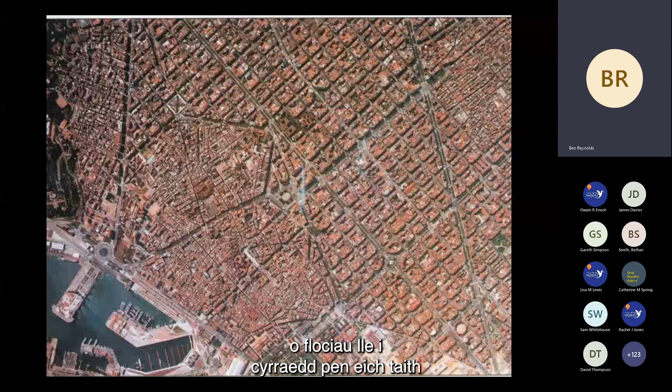In historic cities - that's Barcelona - you can see from an aerial view this fine grain, this grid system of blocks, where to get to your destination you shouldn't really have to take more than 3 turns, sometimes just 2. You can do that by wandering along the streets and weaving your way in and out of the blocks. Paris is based on very similar principles.

A lot of this has vanished in the UK because so much of it was flattened in the Second World War, and when it was rebuilt, thinking was first and foremost about cars rather than about people and how people move around space. But the basic fundamental principle is relatively short blocks that are easy to navigate through.

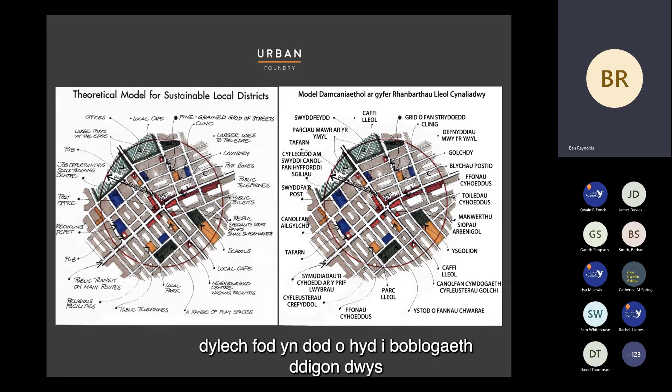The idea of that 5 minutes, roughly, if it's flat, is roughly 400 meters, 10 minutes about 800 meters. If you've got a hill in the way, it goes down a little bit, but it's roughly that. You can draw a circle, and within that circle you should be finding enough density of population to support the commercial centre.

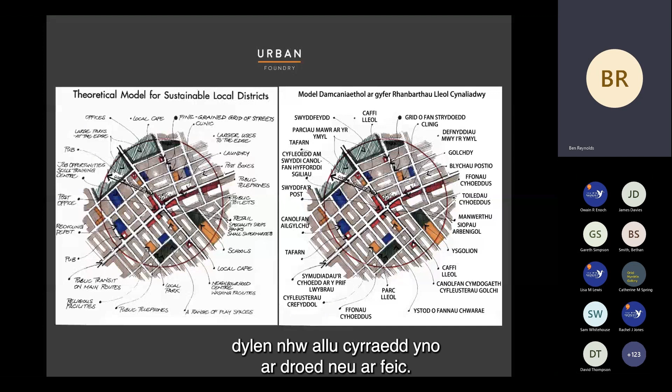And that density of population should be able to get there if they're reasonably able-bodied. They should be able to get there on foot or by cycle. They shouldn't have to jump in a car to go and get a pint of milk. They should be able to service their basic daily needs within that 5 to 10 minute walk.

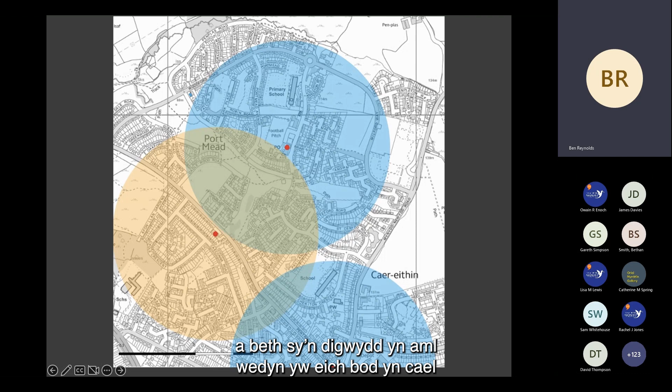And what often happens then is you get this yellow type of circle, which is because it's crumbling and it's falling, the private sector's trying to sort itself out with a new centre, but actually it doesn't work for anybody. And so it's off the centre, which means all the people who've got to get in the car to go and get there, and it creates difficulty.

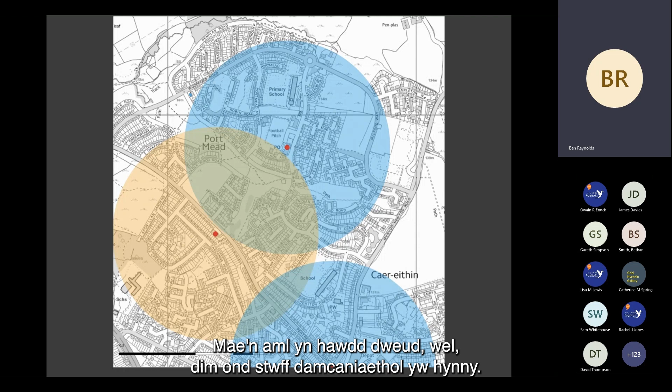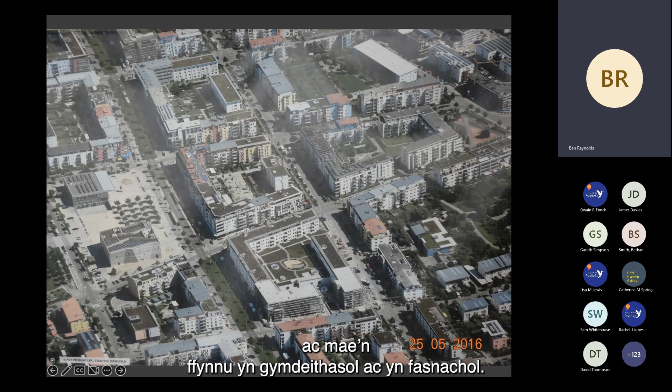And it's often easy to say, well, that's just theoretical stuff, it doesn't work. This is Rieselfeld in Freiburg in Germany. That is a city that is roughly the same size as Swansea. This settlement is roughly the same distance from the centre as that one I've just shown you in Blaen-y-maes, and yet look at the density that they're getting in here, and it's socially and commercially thriving. And so actually you can do it. It's not about, oh, well, we're not New York, we're not Paris or whatever. You can do it in terms of smaller towns and cities as well, of get that density.

And that's where the current idea, which is very, very poorly theorized, but the idea of this 15-minute city or sometimes 20-minute city that you're hearing people come out with - a lot of people aren't really defining exactly what they mean by that, but it's the same basic principles. The idea is that you've got what you need within a sort of 5 or 10 minute, really. I'd be saying 15-minute in a big city maybe, but where you've got good public transport. But in a town or the cities of the scale of certainly that we've got in Wales and much of England, 5 to 10 minutes actually is what we should be aspiring to. Fine, if you're in London, we might be looking at 15, or Birmingham, but everywhere else we should be aspiring to 5 or 10.

The fourth one, which then is a key principle, is the varied age and use of buildings, and that's the yield of the buildings is often spoken about in that sort of context. And what that's about really is if all of the buildings are all of the same age and of the same type and the same condition, they're all going to be commanding the same amount of rental per square foot. And actually, what you don't want is large building users dominating space. So great big modern private developments distorting space, because often modern development now is working on a yield of 10 years, sometimes even down as little as 4 or 5 years.

And if you're not familiar with yield, it's basically the idea of how quickly do you want to make your money back. So if you build a building for £1 million and you have a 10-year yield, then you want to be getting back about £100,000 a year in rental off that building. And after 10 years, it's effectively paid for itself, plus a little bit of interest. Some buildings sometimes with development, maybe not at the moment, but in modern eras have actually been on for 25% yields, where they're actually trying to make their money back in 4 years.

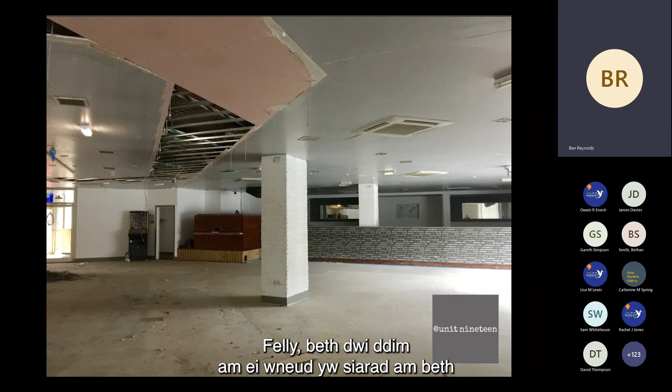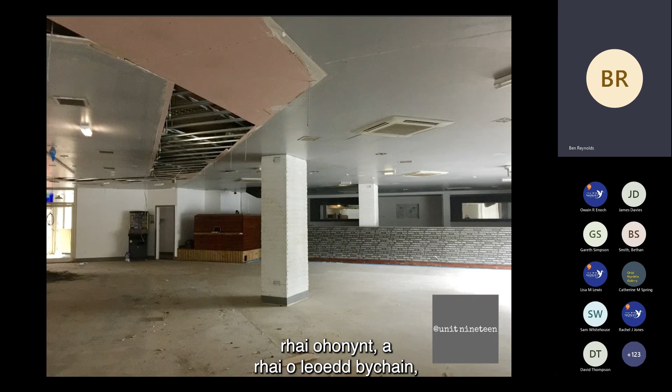I'll just throw you a couple of examples of ones we've done here in Swansea as a pilot project. Taking big old empty spaces, some big and some little, and starting to do interesting things in pop-up, which is quick, fast, light, and cheap. Things ranging from pop-up music and street food to activate spaces and get crowds in, for an early evening economy in this case.

What we wanted to do was try to get people with children into town centres, so it wasn't completely dominated by an 18-30 drinking audience. Through to running pop-up classes, we built a pop-up park into a space and ran yoga classes and well-being club spaces, and we've had live music pop-ups too.

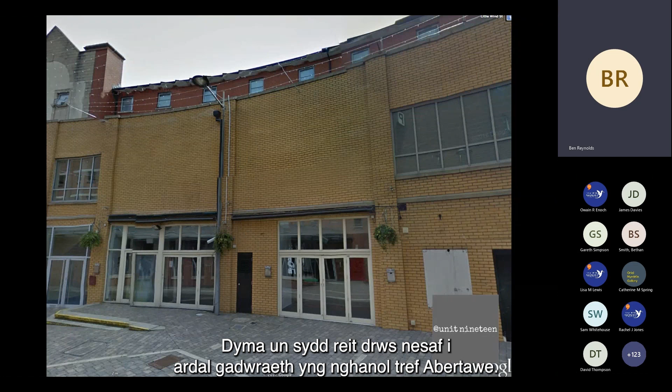Taking rather bland infills - this one is right next door to a conservation area in Swansea's town centre. You've got a lovely bit of historic town just off to the left of the picture, but the modern infill development is great big stuff, and again the problem with the yield was that they wanted very high returns on investment.

It ended up sitting empty, but there are things you can still do, like starting with just a cool, funky paint job on the outside. That starts to bring life to the street and activity to the space.

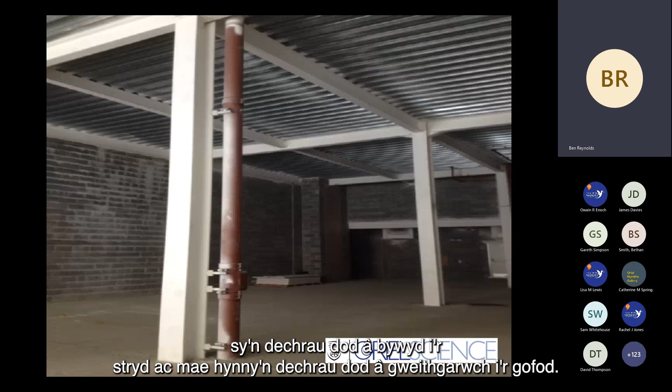Again, this is another infill - Swansea was flattened in the Second World War, so it's got a lot of these dotted around next to some of the more historic bits. The historic high street is only about 50 to 100 yards from this. Again, empty from when it was built, but we put a pop-up science gallery in there, bringing new activity into the space - and that's the back of it.

But you can also do them with little ones, and the creative sector has got lots to teach us about these sorts of things. They're very good at doing quick, fast, light, cheap.

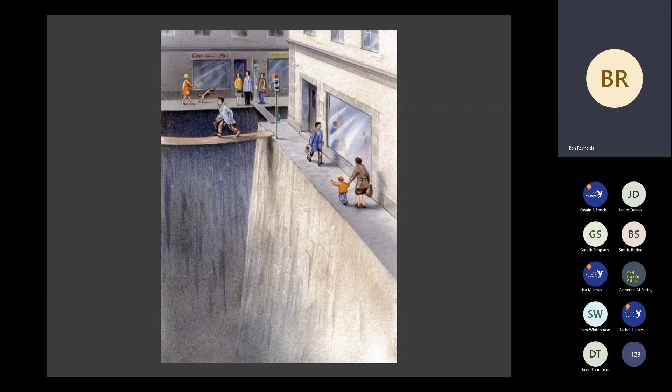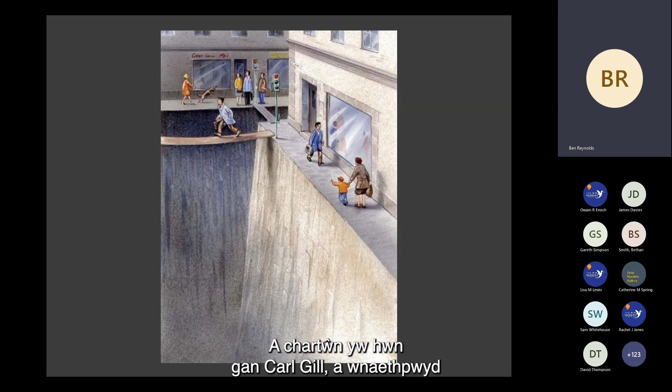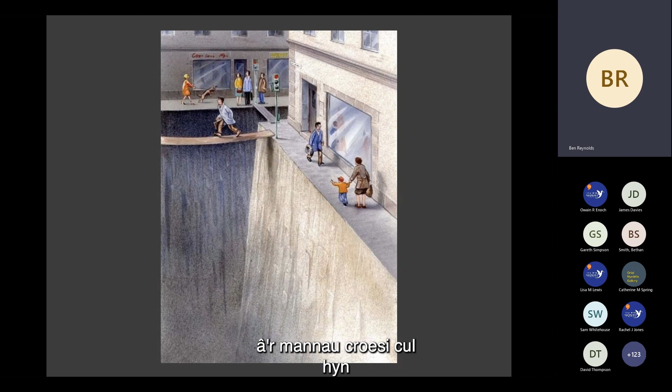The second thing is that what's happened to a lot of our historic spaces is that historic towns are generally not built with cars in mind, because they were built long before cars existed. This is a cartoon by Karl Jilg, done for one of the Scandinavian local authorities and governments, and it exemplifies what many of our townscapes are like now - you might as well have a chasm in between with these narrow crossing points, which are very rickety and dangerous, because we've given over so much of our space in towns to motor vehicles.

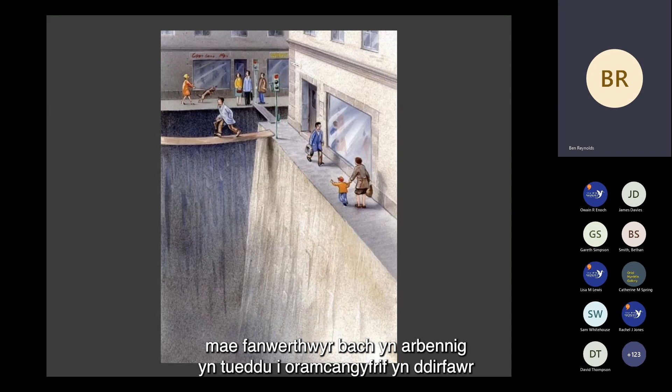If we get that density right, if we get walkability right, if we make them people places, you don't then need the vehicles to do that. You will often get lots of pushback from small retailers, particularly, saying 'this is our lifeblood.' There's actually quite a lot of interesting research out there which shows that in the vast majority of instances, particularly small retailers tend to vastly overestimate the degree to which they're actually reliant on car-borne trade. It's usually far lower in reality than they think. There are quite a few interesting studies done on that in a variety of places.